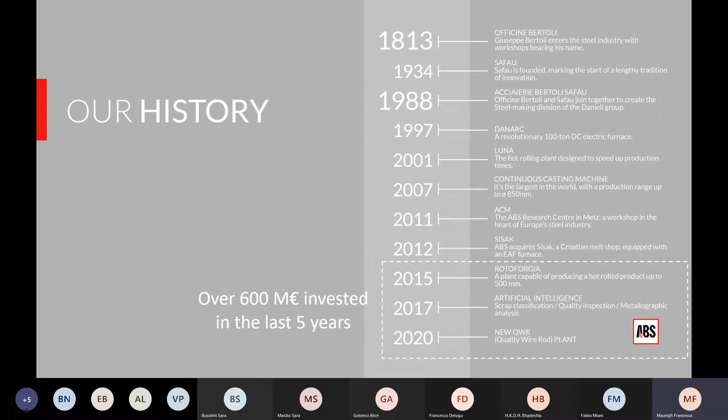Acciai Bertoli Safau is located in Udine, a small town in the northeast of Italy, about 100 kilometers from Venice, towards the border with Slovenia on the eastern side, and with Austria on the northern side. This is where the main productive site is placed.

There is also a second, smaller productive site located in Croatia, in Sisak, not far from Zagreb. As I said, our R&D division, ACM, which stands for ABS Centre Metallurgique, is based in Metz, in France. We also have commercial sales offices spread in Europe, apart from Italy, in Spain, Germany, and Sweden, where our main European customers are present.

We are exporting steel to many different countries worldwide. About 50% of our output is sold to Italian customers, whereas the remaining 50% is mainly delivered in Europe, and about 10% of our output is exported outside of the European community.

We are producing many different steel grades, over 1,000 different grades, which are mainly used for mechanical engineering purposes. But our very important sectors are also the automotive sector, as well as oil and gas and power generation, and many other smaller applications.

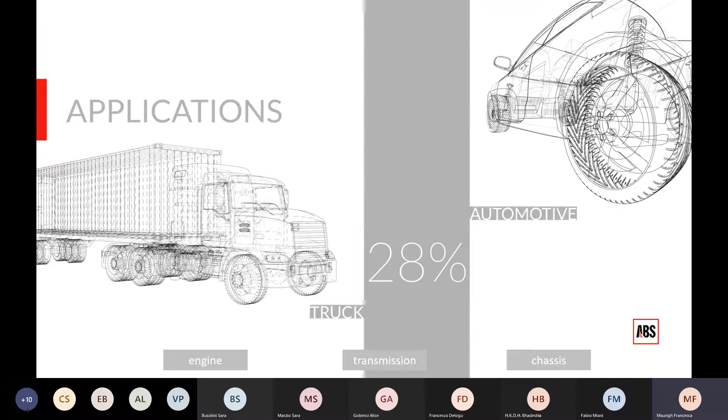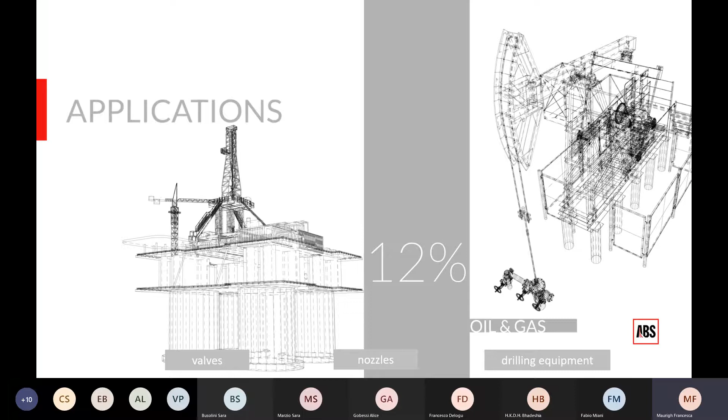The oil and gas market is important for either the forging of valves, nozzles, but also for direct machining of many different parts used in drilling equipment.

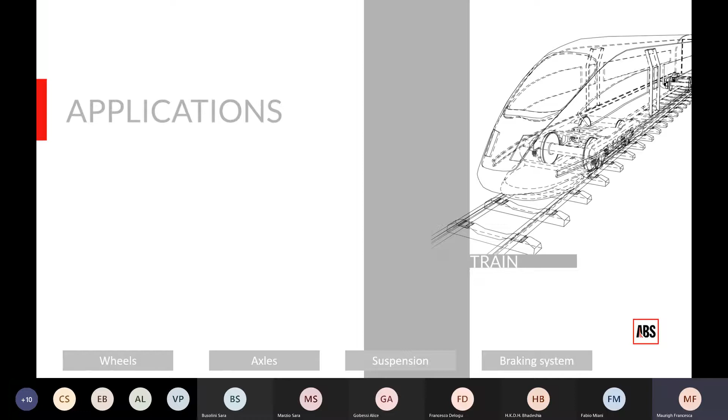Another important application for our products is what we call the railway sector. Our bars are used for forging and machining of wheels and axles for trains, including high-speed trains, as well as for some suspension parts and for parts used in the braking system of trains.

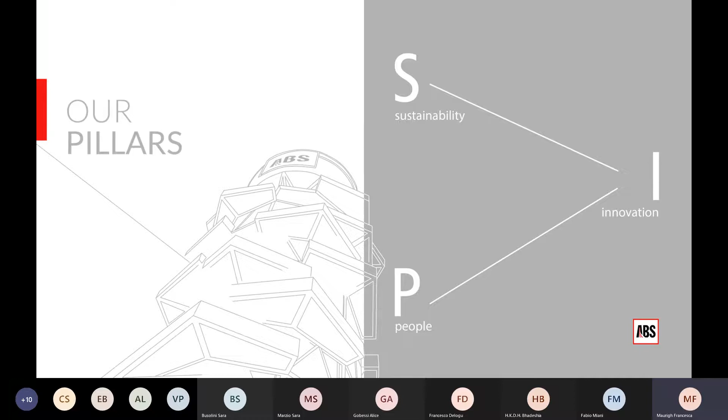If we have to summarize the key points of our company, I would say that sustainability, innovation, and care for people are the three most important topics. When we speak about sustainability, we mean sustainability not only from an economic side, but also from environmental and social sides. If we speak about innovation, we will later see what we mean by innovation in the production of long products. And people, of course, is a key driver for supporting innovation and sustainability.

So if we move to the description of our production process, let's say that ABS is a steel mill which starts from scrap. The scrap is collected into the scrapyard, and then it is charged into one of our electric arc furnaces, where it is melted.

Once it is melted and tapped from the electric arc furnace, we have several ladle furnace stations and vacuum degassing tanks, where we carry out the refining process, and for most grades, the degassing process as well, as it is a very important step for guaranteeing a high level of quality for the grades we produce.

Once the steel making process is completed, the solidification of the steel can be carried out by choosing either continuous casting machines or ingot casting. So we can solidify the steel either by means of continuous casting machines or in a more traditional way, into ingots.

Once the ingots on one side, or the continuous cast blooms on the other side, are produced, we stock them, then we reheat them inside either walking beam furnaces or pit furnaces, in the case of ingots, and we use one of our rolling lines.

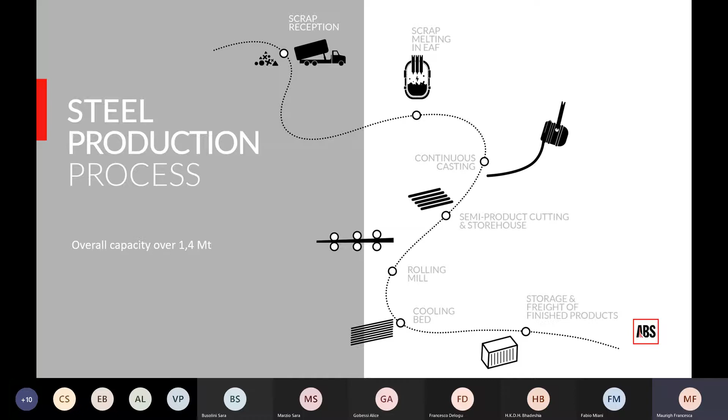Each melting line is formed by an electric furnace, a ladle furnace, and a vacuum degassing treatment station. We have very recently started a new LF and VD station in order to increase our capability for these processes. Another electric furnace in line with a ladle furnace and vacuum degassing treatment tank is placed in the mill

that we have in Sisak, in Croatia.

In ABS Udine, we have three continuous casting machines. The machines are different with respect to the casting size. We call them in a very easy way: CC1, CC2, and CC3.

The most interesting continuous casting machine is the CC3, which is also called Hercules because of its size. I will later show some details about this almost unique machine.

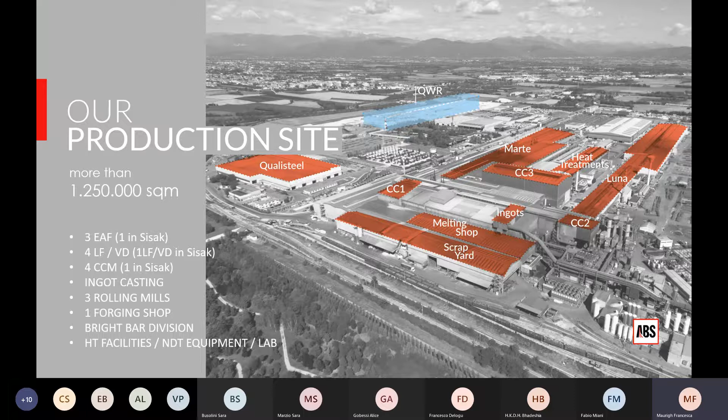We produce more than 1,000 grades. Our yearly output, our yearly capacity, is about 1.4 million tons, and therefore we are considered quite a big mill for the production of long products, at least in Italy, of course. This is our range.

I would say this is one of the strongest points of ABS, because basically we start by rolling 5 millimeter wire rod, and we can deliver up to forged bars with a diameter of 1 meter. In between, we are really covering almost any possible product in either round or square shape.

We have a wide range of continuous cast blooms, most of them in round section, starting from 200 millimeters up to the biggest size, the jumbo size of 850 millimeter round. This wide range of conti cast blooms allows us to offer the market a wide range of hot rolled products as well, starting from 29 up to 500 millimeters of diameter for round bars.

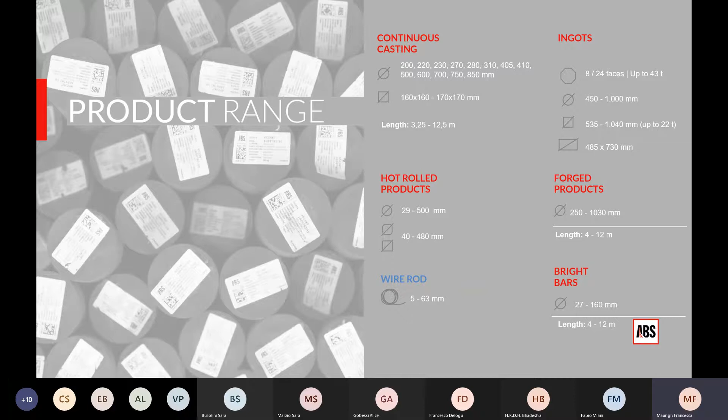I will not describe step by step all the productive facilities we have in ABS. I will just focus on what is more interesting and more unique among the machines installed here.

One of them is for sure what we call continuous casting number 3, because this is one of the largest continuous casting machines in the world for the production of blooms. It can cast blooms starting from 500 millimeters, which means half a meter, up to 850 millimeters. It's a curved continuous casting machine with a radius of 18 meters, so really big.

It has 2 electromagnetic stirrers per strand, and this has allowed ABS to replace a significant amount of ingots as a starting product to roll very big rolled bars, but also as a starting product to be directly sold to our customers for hot forging applications, such as ring rolling and open die forging of really very large products.

So this is really quite a unique plant. There are not that many machines bigger than this one. For sure, in Europe it's still the biggest. Out of Europe, I think in China you can find something bigger, but it remains one of the biggest continuous casting machines.

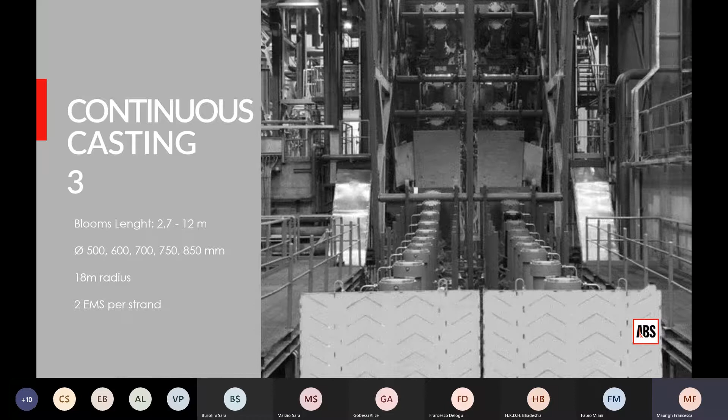Another unique piece of equipment we have installed in ABS is what we call the rotoforgia. This is a rolling stand, as you can see in this picture. What's particular about this stand is that it's the largest stand in the world for the rolling of long products.

The maximum diameter of the cylinder of the roll used is 1.8 meters, and we can roll bars up to 500 millimeters of diameter with very good performances in terms of internal soundness.

This rolling stand is capable of ensuring a good level of internal soundness, which makes these products not so different from typical forged products obtained by means of forging instead of rolling.

This is thanks to the fact that a high reduction ratio, but also a high squeezing capacity - the capacity to deform the material up to the core - can be applied to the bars under rolling, bars which can be rolled from either huge, big conti cast blooms or from ingots.

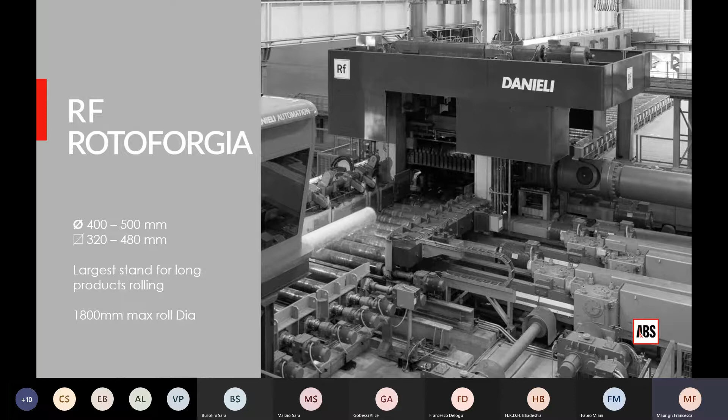Let's say the newest plant, installed almost a year ago, is in ABS, so we are completely on the opposite side of our size range. I've just talked about the rolling of big bars. Now I'm moving to the rolling of wire rod.

This is a wire rod mill, a plant with a very big capacity, almost 500,000 tons per year of special steel wire rod. The size range is 5 to 25 millimeters of diameter, capable of covering most applications obtained by wire.

It's a brand new plant with a very high level of automation. In fact, we call it quality wire rod 4.0 because Danieli has tried to develop the zero man on the floor approach, as well as the highest automation level for this kind of plant.

The full process is controlled remotely. We have tried to develop, in terms of reheating process, low scale and energy saving reheating processes. We have tried to set up the highest level of control of the size range during rolling.

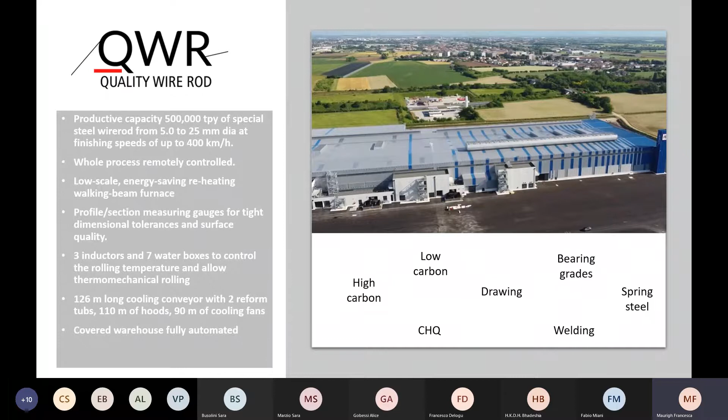So this is a very short introduction and description about ABS. Let's now move to what our R&D division is.

As I said at the beginning of the presentation, our R&D lab is located in Metz, France. It's called ABS Centre Metallurgique. There are 18 people working in Metz with different kinds of graduation and skills.

All of them are oriented towards giving support for either the development of our processes, to improve the performance of our products by controlling and improving our processes, and towards the development of new products, new grades, or modification of existing grades, following our customer needs in terms of higher reduction of CO2, hydrogen sensitivity, better performance in mechanical properties, fatigue, and so on.

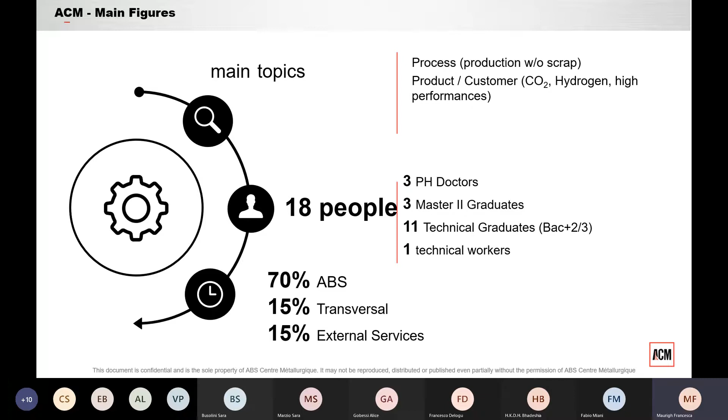ACM is mainly working for ABS, but can also offer services externally, thanks to the fact that the laboratory of Metz is qualified ISO 17025 for some of the most common and typical characterization tests carried out on steel.

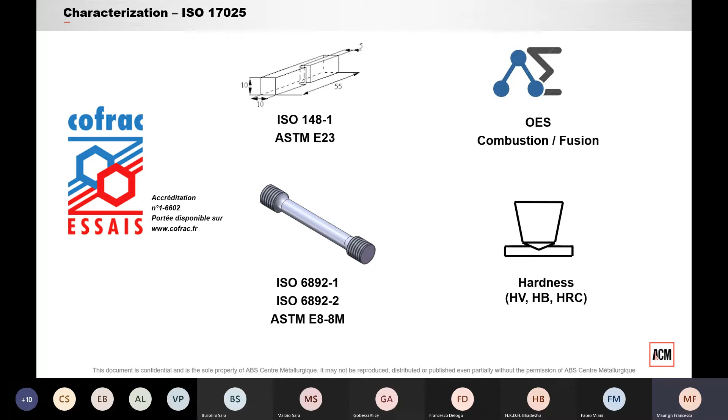But I really want to spend a few minutes to present some of the activities that ACM is following. ACM is providing assistance and support for industrialization and development of new grades, thanks to the fact that we can perform a deeper characterization than the standard one, as far as macro cleanliness and micro cleanliness of steel are concerned.

We have an ultrasonic immersion tank for UT tests. We have an electron scanning microscope, automatic inclusion identification and classification. We can perform plasto-dilatometer tests to provide further information about the grades we are studying. We are using several predictive modeling tools to try to model our processes.

We are also committed to developing new solutions for our customers, mainly following two directions. We are trying to make our products more sustainable, for instance by developing grades that don't need heat treatment processes.

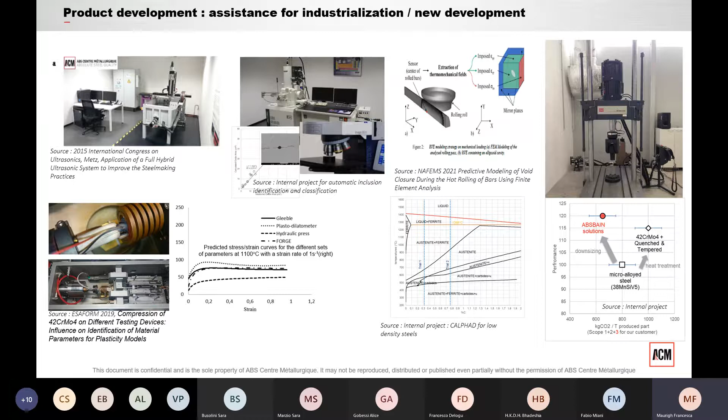We are also trying to provide higher performance to our steel products in order to let our customers achieve downsizing of parts, and therefore lighter final parts, and therefore reduction of emissions of CO2. These are the most important directions we are trying to give to the development of our products.

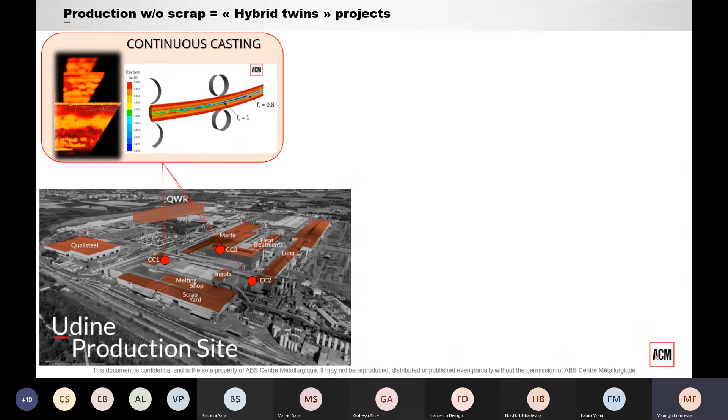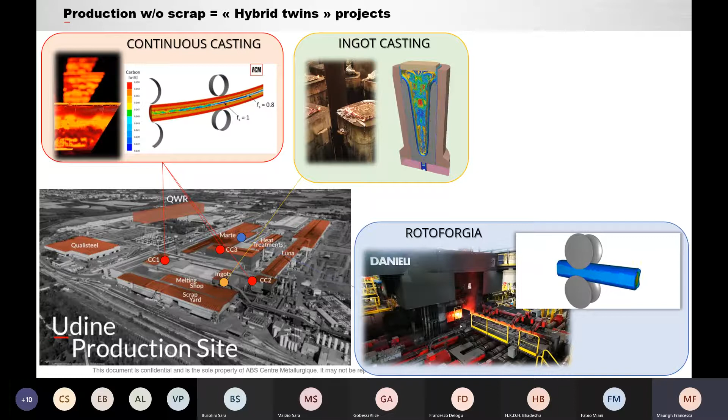If we speak about support for development of our processes, which of course aim also to provide better performance to our products, we are developing what we call hybrid twins projects, for instance about continuous casting, about our ingot casting processes, about our rolling processes, trying to model reheating processing and rolling processes, aiming to achieve the best core conditions for our rolled bars.

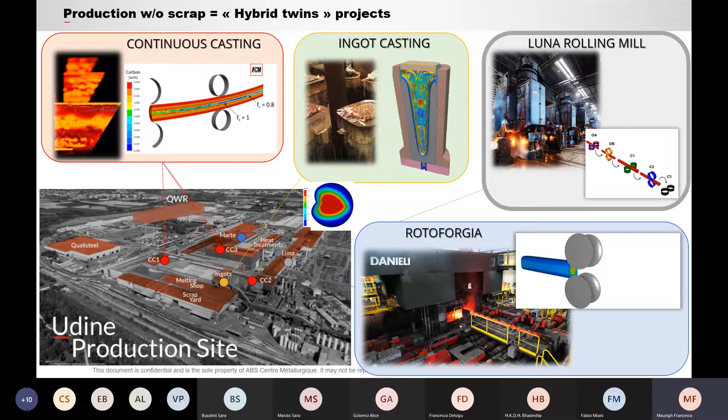We are also developing models for our second rolling mill in order to try to optimize the plastic deformation under rolling, therefore achieving better surface quality and better surface performance for our bars. So that is really a very quick overview about our company.

I have finished. I hope to be on time, not too long, but thank you for your time. If there is any kind of question, but if we are not too late, because I don't want to keep time from the lesson, I'm here. It's up to Harry to decide. As for me, as you would prefer, Harry. I don't know if you have any other issues that you prefer to start with. No, I think we'll take questions.

So I have one question. In the new wire rod mill, you explained that you have hoods to slow the cooling rate down and fans if you want to accelerate the cooling rate. So what sort of product requires you to slow the cooling rate down?

There are grades which need to be developed to be delivered with very soft properties, such as CSQ quality. This is material which is then drawn and cold forged, so anybody doing the cold forging is of course needing soft material. There are some grades which are more critical, and we need to go through annealing processes out of line. But there are many other grades, such as boron grades, typical boron grades for CHQ quality, where we need to slow down as much as possible in order to guarantee a maximum hardness and a maximum tensile strength to be cold forged directly without the need for any annealing treatment before.

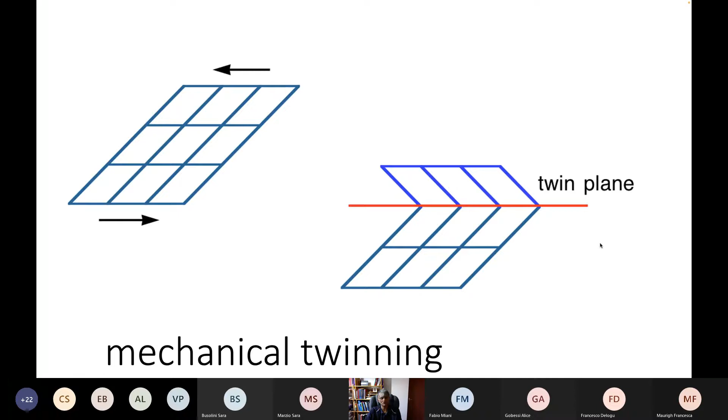And in the case of austenite, the twinning system, that means the plane on which the twinning happens, is the close-packed plane, the one-one-one type plane, and the direction in which the twinning happens, the twinning shear, is directed.

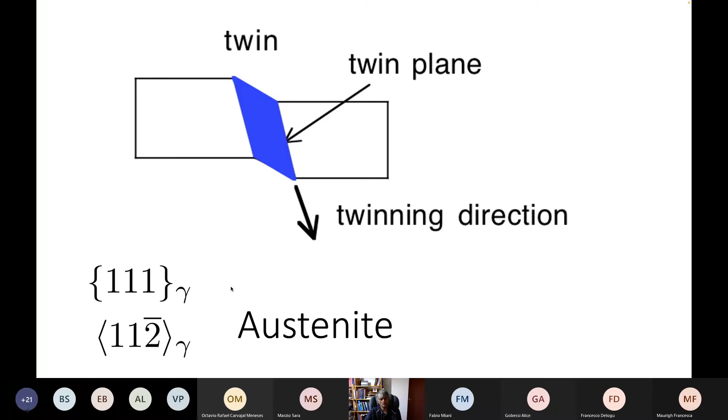So the twinning system in austenite consists of a twin plane, which is the close-packed plane of the austenite, and a twinning direction within that plane, which is of the type 112. I'll illustrate that later, but the twinning direction is the 11-bar-2 in this case, and the twin plane is the plane which remains unaffected by the twinning deformation, which is the 111 plane of the austenite. We know that the 111 plane is close-packed, meaning the atoms touch along all three directions, giving a high packing density inside that plane.

The close-packed planes are stacked above each other in the FCC structure of austenite in a sequence A, B, C, A, B, C. Now what do we mean by that? If in this particular plane the atoms are located at positions A, there's a dip in between these three atoms, which is position B, where the atoms in the plane above can lie, or in a position C.

If I translate just from A to A, that doesn't change the crystal structure. That is simply like slip happening along the 110 type directions. A translation through that vector doesn't change the crystal structure.

However, this direction A by 2, 110, where A is our lattice parameter, can be split into two 112 type vectors: A by 6, 211, and A by 6, 12-bar-1. If I translate the layer above this layer from a C position to a B position, then I actually change the crystal structure. I've introduced effectively a fault in the lattice. If I carry out this translation on every single 111 plane, the result is a twin, a mechanical twin in the austenite. So the displacement is A by 6, 211 here.

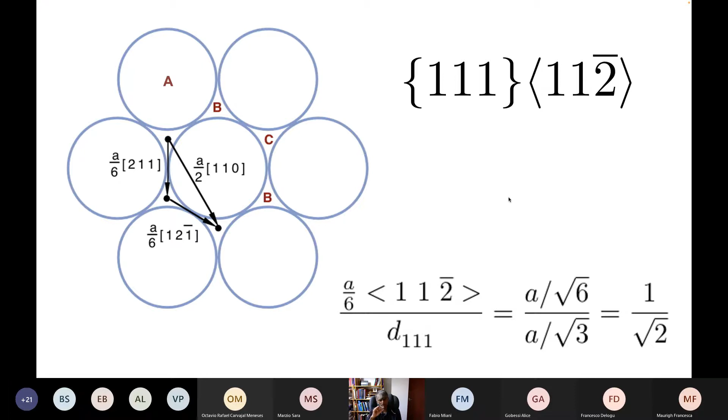So twinning involves very large deformation, and that's why mechanical twins will always form in the form of very thin plates in order to minimize the strain energy.

So this plane here is our close-packed plane, and I'm stacking them in a sequence A, B, C, A, B, C, illustrated over here. This represents our face-centered cubic crystal structure of austenite, and this is a repetition of that stacking sequence, A, B, C, A, B.

Now I'm going to displace one half of that crystal relative to the other by A by 6, 112, and that results in this: we have A, B, C, B, C. Then I conduct another displacement on an adjacent close-packed plane, and that results in A, B, C, B, A.

Notice that about this twin plane C, I have reflected the crystal structure. B reflects to B, A reflects to A. So this is our mechanical twin, and its lattice is a reflection about the twin plane of the parent structure.

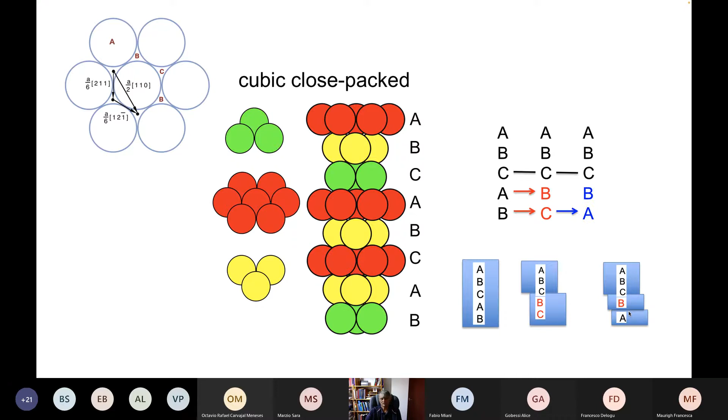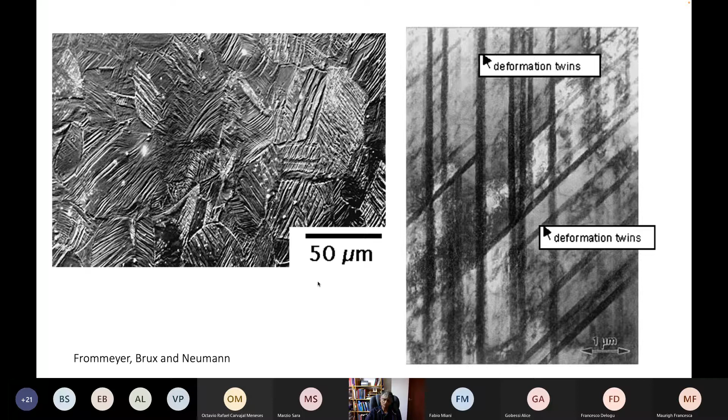Yielding, the yield strength in this particular case is really quite small, about 300 megapascals. But you can continue the deformation until the strength exceeds 1.2 gigapascals and maintain an elongation of something like 60%. This is quite a remarkable combination of properties, but it starts off at a low yield strength, and then there's a steady work hardening rate as deformation continues.

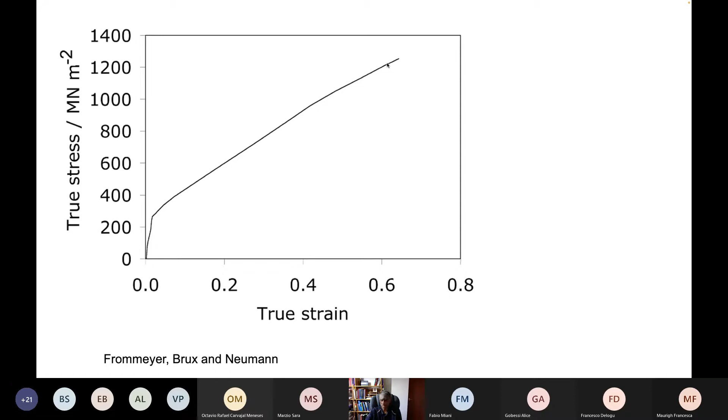So what is the reason we don't get an early plastic instability? Just like in normal steels, you don't get to 60% elongation at this level of strength. Well, what's happening is something known as a dynamic Hall-Petch effect. In other words, the formation of mechanical twins effectively reduces the grain size of the austenite. So as the twins form, the effective grain size in the Hall-Petch equation is decreasing during deformation, and that is what gives us the work hardening that prevents an early onset of plastic instability. We are not transforming this austenite into martensite at all, it's just mechanical twinning, refining the effective grain size as deformation proceeds.

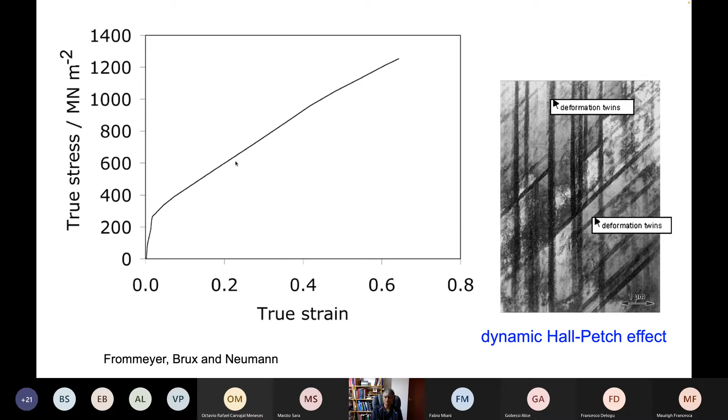So TWIP steel's typical composition is 25 manganese, 3 silicon, and 3 aluminium. If you only had the manganese and iron, you would still get it fully austenitic, but it would tend to undergo phase transformation to epsilon martensite as you deform. The addition of these further elements, there are various reasons for adding them, but one reason is that you remain fully austenitic as you deform. Now, because silicon and aluminium have low atomic weights, the overall density is actually reduced quite significantly. Normal iron has a density of about 7.8 grams per centimeter cubed, this is 7.3 grams per centimeter cubed, and it's fully austenitic and maintains its properties to cryogenic temperatures.

So one application for TWIP steels that POSCO has considered is pressure vessels used to carry liquefied gas. They are usually made from 9% nickel steel, but they have also made them from TWIP steel. And of course, as you lower the temperature, there's no significant change in toughness. Therefore, there's also no significant change in toughness as you increase the strain rate, up to 10 to the power of 3 per second.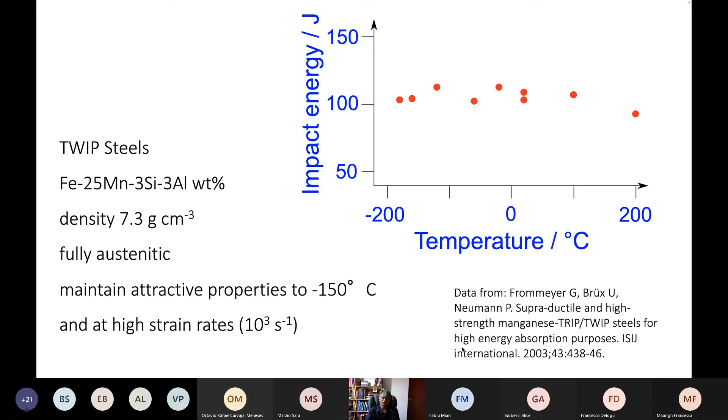Now, everything looked very promising for these TWIP steels for many years for automotive applications, because if you have a large elongation and a large strength, that's a good thing for formability. But when some components were made, they tended to crack spontaneously after a certain period of time. This is known as delayed fracture, and it's illustrated here in a cup that has been drawn out from TWIP steel. This is a 22 manganese, 0.6 carbon TWIP steel, and after an unpredictable amount of time, the cup simply cracks up. Now, the purpose of drawing out a cup is that you also have residual stresses inside that drawn cup. That combined with something else causes this delayed fracture.

But the addition of aluminium gets over the problem. However, when the delayed fracture problem was highlighted, the automotive industry basically abandoned TWIP steels because they thought of them as being unreliable. The problem is actually solved by the addition of aluminium, and there are various ideas on how this stops this mechanism of fracture, which is associated with hydrogen embrittlement. This kind of fracture can be accelerated by introducing further hydrogen into the material, so there must be something about aluminium which prevents that hydrogen embrittlement of austenite.

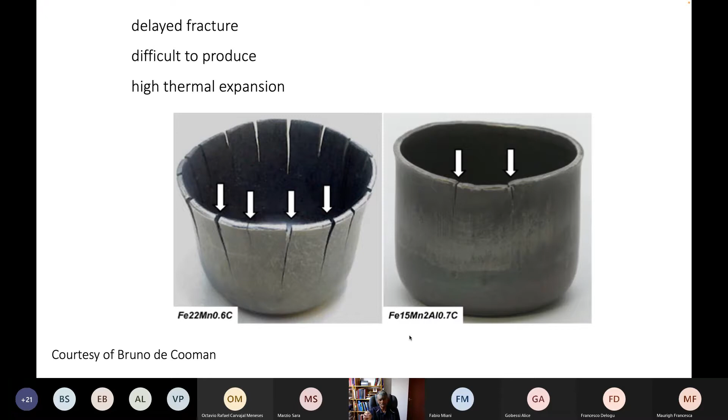And there are various models for this, but one which is really interesting is that the aluminum atom causes a localized expansion around it. So for example, if this is our face-centered cubic unit cell, and these are the heights of the atoms, these are the face-centering atoms, then the distance between the iron atoms and the aluminium atoms is larger than between the iron-iron atoms.

So there's more space created in the interstices between the substitutional atoms, and that is where hydrogen gets trapped.

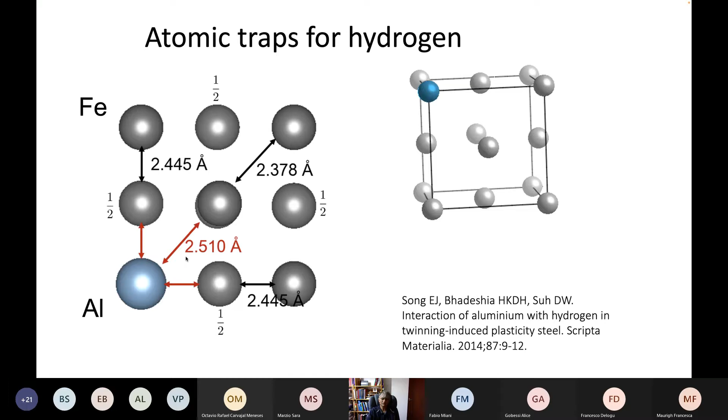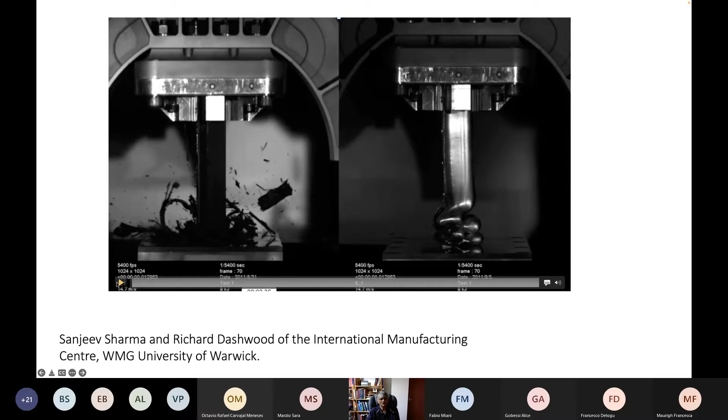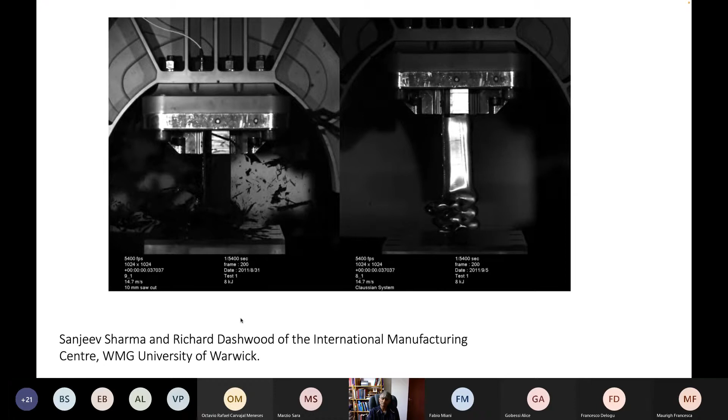people tried to create crash resistance using TWIP steels because they can continue to deform to a large degree of deformation. So the kind of objects I'm talking about: on this side we have a composite material, on this side we have a steel. What you do is you want the material to absorb energy. In the case of the composite, it's by breaking interfaces between the composite components. And in the case of steel, by forming this concertina structure, which absorbs energy by deformation.

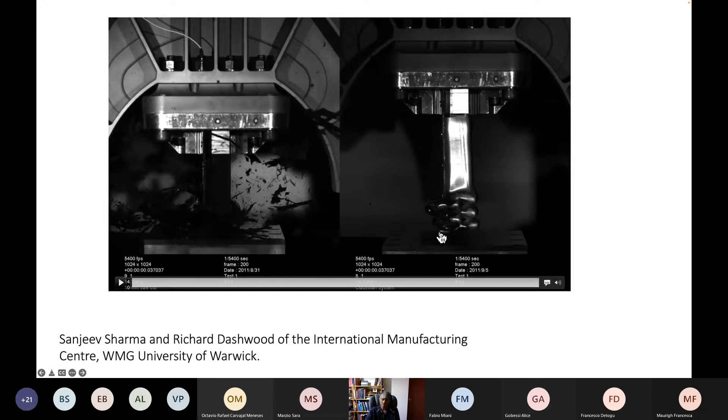Now, the problem with TWIP steel is that its strength only rises gradually. Whereas in this kind of scenario, you are only putting large strains in localized regions, and therefore you don't absorb as much energy as you would expect if you had a curve which was flat like this, except near the yield region. So this application doesn't prove to be successful.

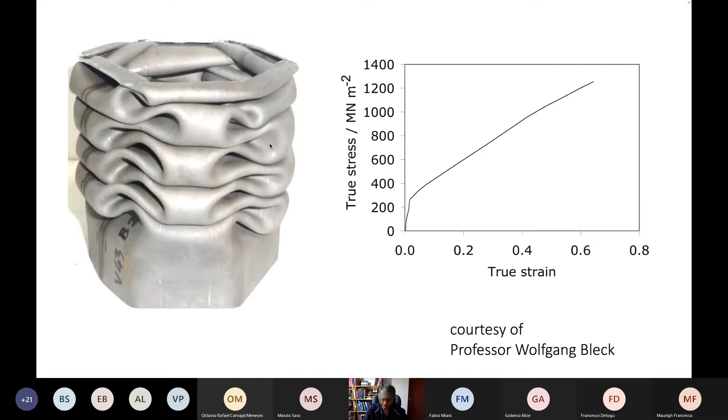However, some very clever engineering by the German railway system has provided a new kind of application for TWIP steel, where in a crash scenario, the whole of the material would deform uniformly. Now, how did they find this engineering solution? Well, these are the crash energy absorbing devices in a railway tram, railway carriage.

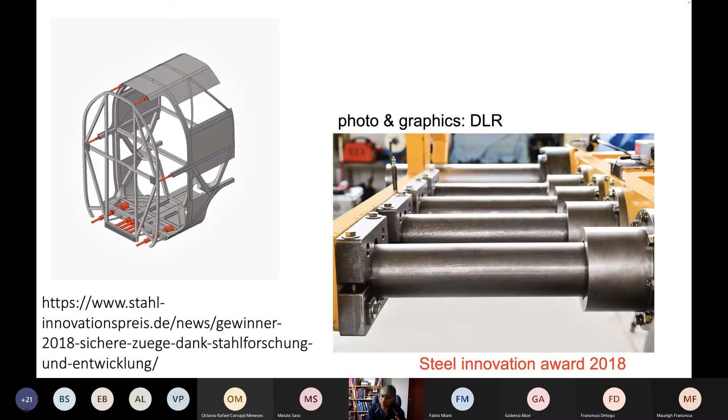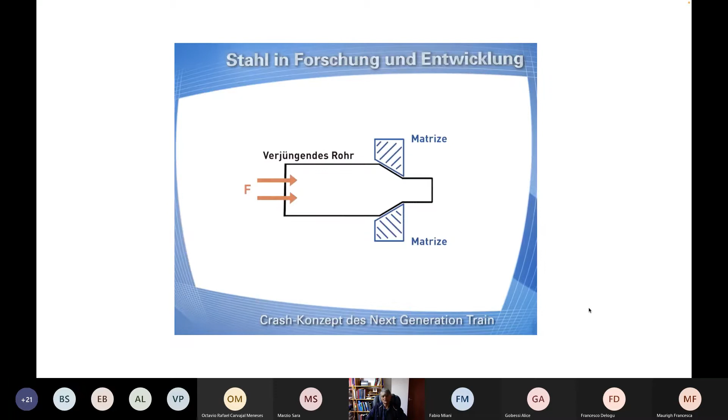What you do is you have these pipes made out of TRIP steel, TWIP steel, and during a crash, these pipes get extruded through dies, and therefore the TRIP steel is uniformly deformed everywhere up to its maximum capacity. I'll show you a video here of the actual behavior of this during a crash. So basically, you're absorbing energy by extruding the TRIP steel.

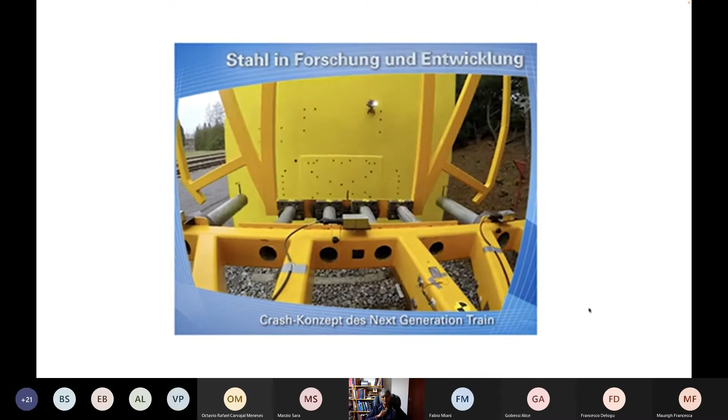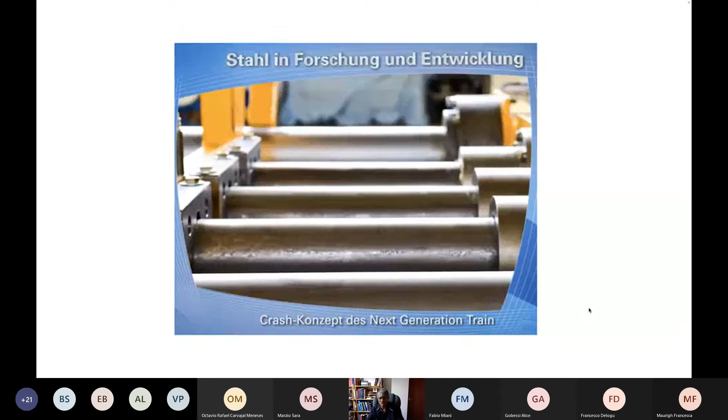I don't know if you saw, but there was extrusion of those TRIP steels through the dies, absorbing energy and stopping that train carriage. I thought this was an incredibly clever mechanical engineering solution to the problem.

So TRIP and TWIP involve transformation or twinning deformations caused by an externally applied stress. Both of them work by increasing the work hardening capacity of the material, and they both lead to greater strength and greater ductility.

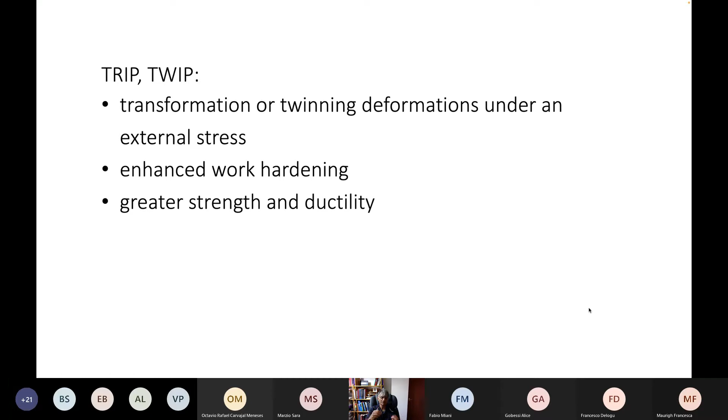Now I want to change the subject a little. Here, in all the examples, both in TRIP steels and TWIP steels, we are exploiting the phenomena by physically deforming the material using an externally applied stress. Now, is it possible that stresses that are generated when constrained components cool - in other words, residual stresses - can themselves trigger these effects and therefore cancel out the residual stresses?

I want to show you an example where transformation-induced plasticity is used to stop the accumulation of residual stress as large components which are constrained are locally heated or cooled.

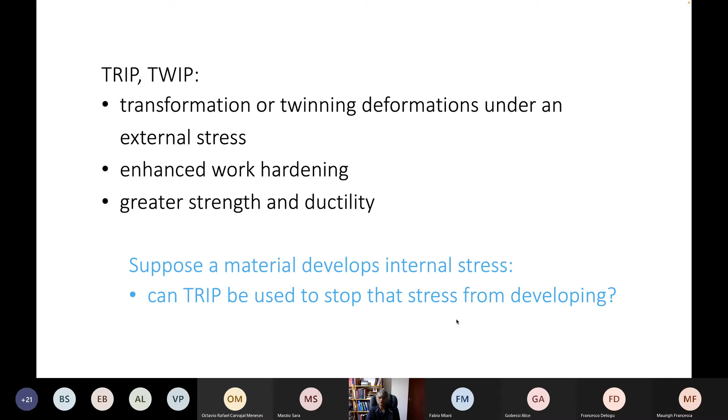So welding is an obvious example because we take two bits of steel and in between we put liquid metal. The liquid solidifies, and if your component is large, these parts don't really want to move as the weld contracts, and therefore you accumulate stress. So that's illustrated over here.

Liquid can of course flow, so there is zero stress when this weld pool is liquid. As soon as it solidifies and the temperature drops, it will start contraction, and therefore you will build up a residual stress. And residual stresses can be very bad for the component in several different ways.

So if there are any stress concentrations, they induce fatigue failure because the applied stress will be complemented by the residual stress. It also means that the stress that you apply to the component has to be smaller than you would expect from the yield strength of the material used to make the component.

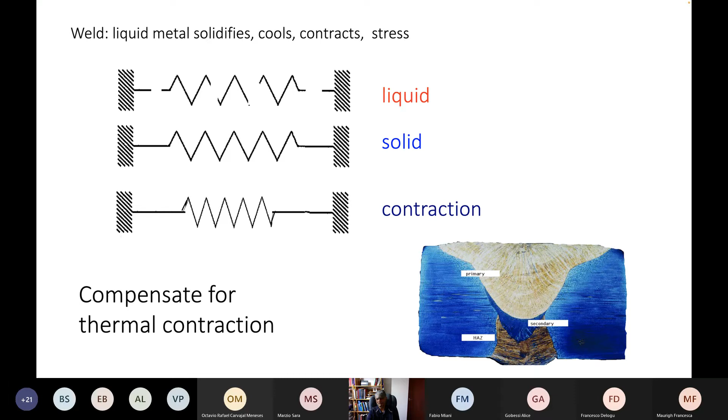So is there any way that we can compensate for this kind of thermal contraction, where after solidification, you build up stress simply because these two ends are completely constrained? So if this is a very large assembly, like one of these platforms, or you're welding pipelines, etc., then residual stresses can be extremely important in your design process.

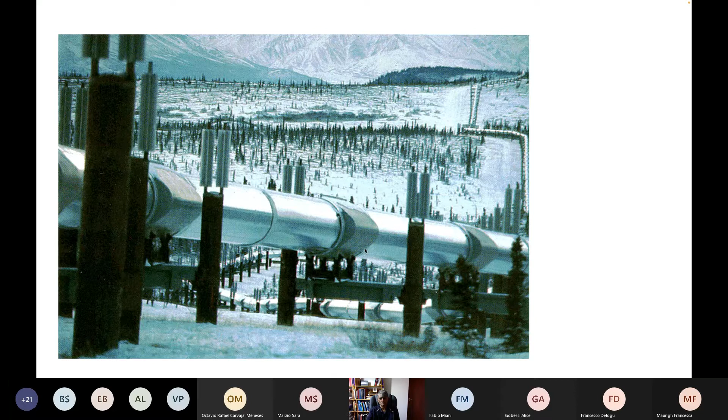Okay, so imagine that we have a sample here, which is an austenitic stainless steel and remains austenitic at all temperatures. This was a classic experiment done in 1977 by Alberry and Jones, where they heated this tensile sample to a high temperature and then physically fixed it and allowed it to contract. As it contracts, you get an accumulation of stress.

It's not - if it was only thermal contraction, this stress would rise rapidly. But at high temperatures, some of the thermal contraction is accommodated by ordinary plastic deformation. So the rise in stress is lower than you would expect, but nevertheless significant at about 300 megapascals.

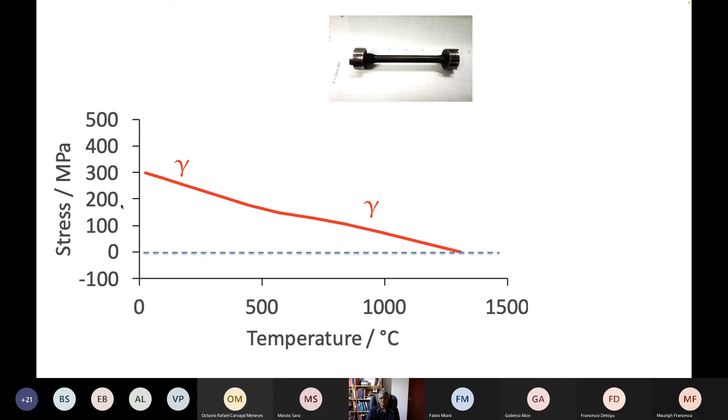Now suppose you do the same experiment with a steel which transforms during the cooling process. This is a bainitic steel, and once again we get the rise in stress due to thermal contraction. But as soon as we get the onset of phase transformation, that compensates for the thermal contraction, and we get a reduction in stress. However, when the phase transformation is exhausted, meaning all the austenite has gone, the stress begins to rise rapidly, and we end up with a large residual stress at room temperature.

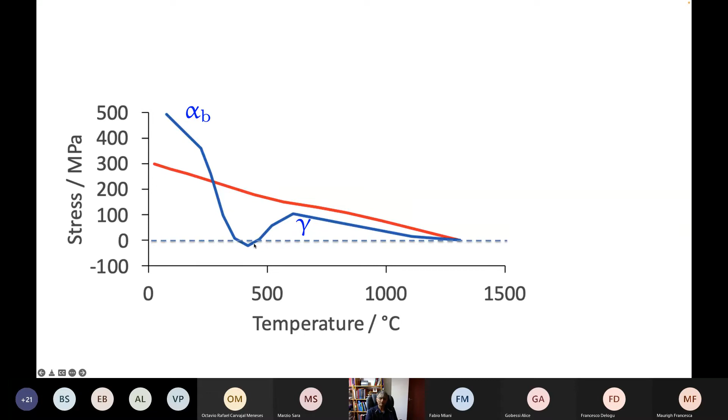So what happens if we lower this transformation temperature? Instead of bainite, if we now produce martensite, once again the same phenomenon occurs until we get phase transformation, which cancels out the effects of thermal contraction. Because the transformation is exhausted at a lower temperature, we end up with a smaller residual stress.

So this gives you an idea on how to design a welding alloy that would leave your component with zero residual stress at ambient temperature. All you have to do is move this point to somewhere along here. Cause the phase transformation to happen at a temperature of around 200 degrees centigrade, and all the austenite should be used up by the time you get to ambient temperature, because we don't want retained austenite left.

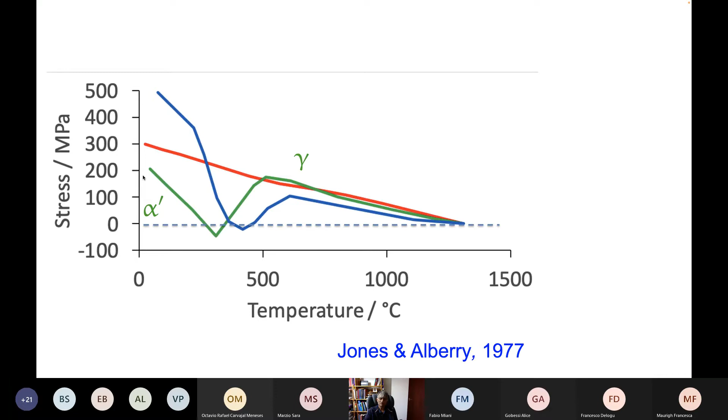Now, when designing a welding consumable, you can't simply just alter the transformation temperature. You have to look at a very large range of mechanical properties which have to be satisfied. For example, the toughness measured in either of these ways, or the fatigue properties, corrosion properties, etc. So a design problem is never simply a single parameter.

And that is where graphene has gone so badly wrong - they were looking at the strength of a carbon-carbon bond and then claiming all sorts of things. But you can't actually use that at all for structural applications. You have to have a whole bank of properties in order to make something useful.

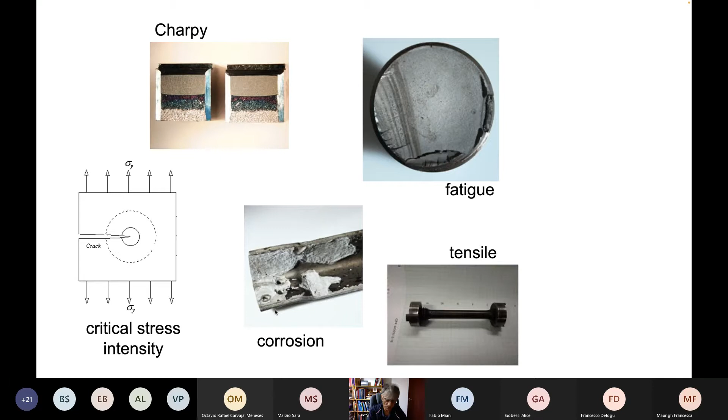So how do we do this? We have a lot of experience in designing welding alloys, and this is a commercial alloy. Quite straightforward - all of these contain a very low carbon concentration because we don't want to produce martensite. There's a certain amount of silicon and manganese added for deoxidation, because remember, you're pouring the liquid without any of the normal refining processes that we implement for normal steels. And there's a certain amount of hardenability required to avoid high temperature phases.

So this is a commercial electrode which transforms at a high temperature of about 450 degrees centigrade. These are three alloys which transform at low temperatures, and you can see that the nickel concentration here is quite high, to force the transformation temperature to a lower temperature.

Now, the first thing that a steels person will say is that nickel is expensive. But remember that the amount of welding material you use is not very large. And furthermore, if you increase the life of the component, then the overall cost is actually reduced. So never just look at the cost of an alloying element - look at the benefits that it produces, and whether, if you look at the whole life cost, that is reduced.

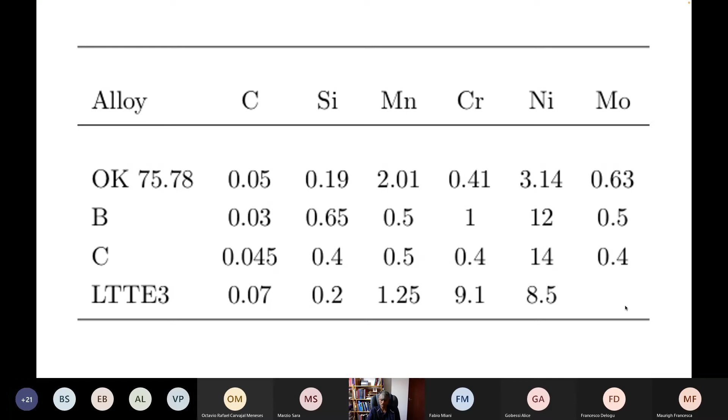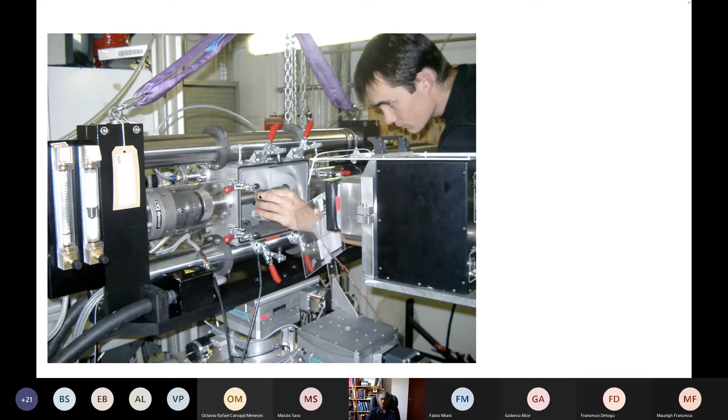So we designed these three alloys and decided to repeat the Alberry and Jones type experiment, but this time also using X-ray diffraction to follow the phase transformations and various other features of the behavior as the material cools. This is effectively a dilatometer attached to a beamline at Grenoble, with high energy X-rays coming out from here, and this is our sample positioned inside the dilatometer. We can monitor everything that happens - the stress, all the information from the high energy X-rays and so on as the cooling happens. So it's straightforward from X-ray diffraction to calculate how much austenite you get and how much ferritic transformation products you get as the material cools quantitatively.

So I'm going to show you now the Alberry and Jones type curves taken using the technique that I've described.

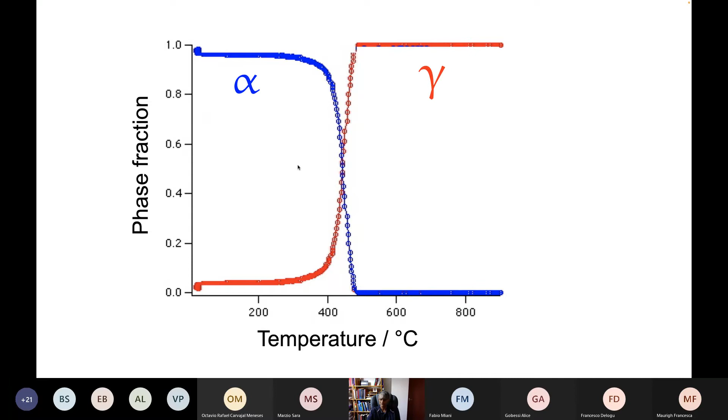Now, of course, these are tensile specimens, and what you've got to do is prove this for an actual weld metal. These tensile specimens are roughly 5 millimeters in diameter, because the X-rays can then penetrate the whole of the specimen. Whereas a weld will be a much larger object, which cannot be penetrated by X-rays.

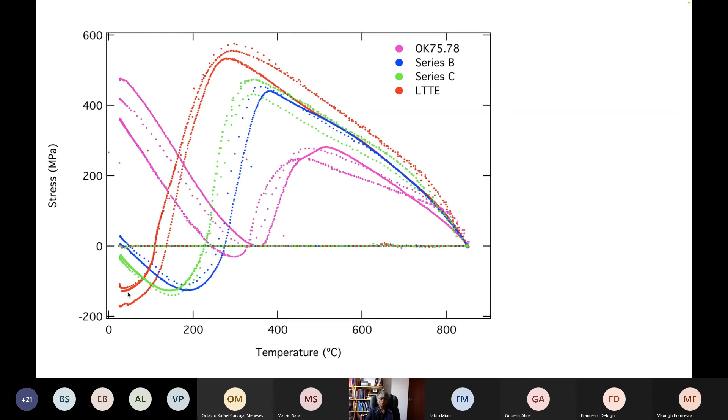Okay, so this method actually works, and there are many tests now in the literature, going from the work of Ohta and so forth, which show that actually the fatigue properties are improved because of this compressive stress system that you develop.

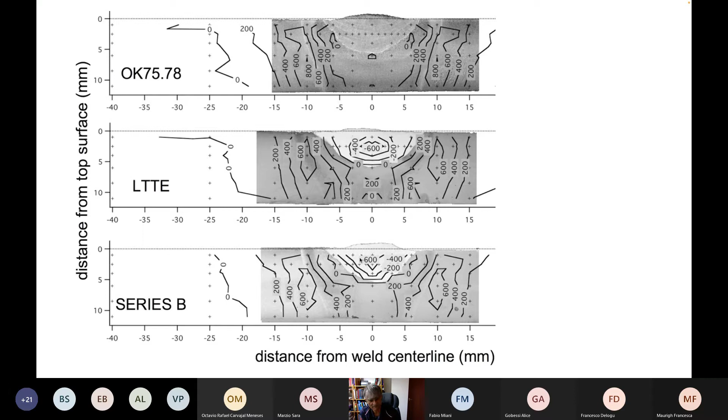Now, supposing that we wanted to design, so these are actually transformed into ferritic transformation products, but supposing we wanted to design a stainless steel containing a large chromium concentration, okay? So we need a chromium concentration greater than 12 weight%, because that gives you a reliable, coherent and adherent chromium oxide film on the surface, which regenerates if it is scratched.

We must have virtually zero carbon concentration because of the problem of carbides forming, chromium carbides forming. We need a low martensite start temperature, but not too low, so that we can exploit the full capacity of the phase transformation. And we need to suppress the martensite start temperature with solutes other than carbon.

But at some temperature, it must be capable of being fully austenitic. Now, if you add lots of chromium, then you can end up with some delta ferrite, which remains stable at all temperatures. So we need to balance the alloy so that it can become fully austenitic at high temperatures. And it's important that it solidifies as delta ferrite, because sometimes delta ferrite can absorb impurities, right? And therefore you stop hot cracking of the welding alloy.

Whereas if it solidifies as austenite, austenite rejects the impurities into the liquid, and therefore you tend to solidify the liquid at too low a temperature, and you get hot cracking developing as the weld pool cools.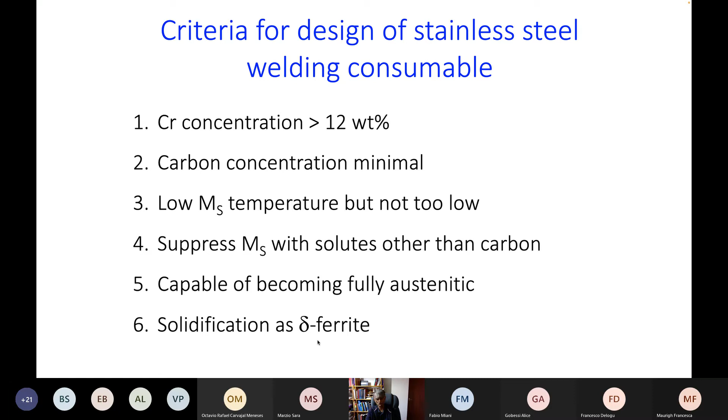So we designed these alloys here. This has a very low carbon concentration, chromium 12%, 4% nickel, so to ensure that it becomes austenitic at high temperatures, and otherwise very, very simple. Now, this is a composition specification, really, that is for martensitic stainless steels, right? But we don't want a very large carbon concentration.

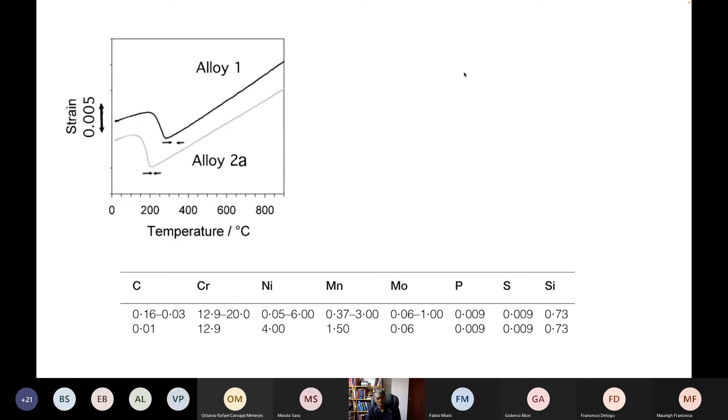So you can see that the transformation happens at a low temperature, okay? Both of these alloys transform at a low temperature, which is exactly what we want. But these are stainless steels. And residual stress has two effects.

And what this shows is, it is so incredibly possible to control a whole bank of features of phase transformations to achieve a good combination of mechanical properties, even when you make large-scale structures. And I'll be happy to answer questions.

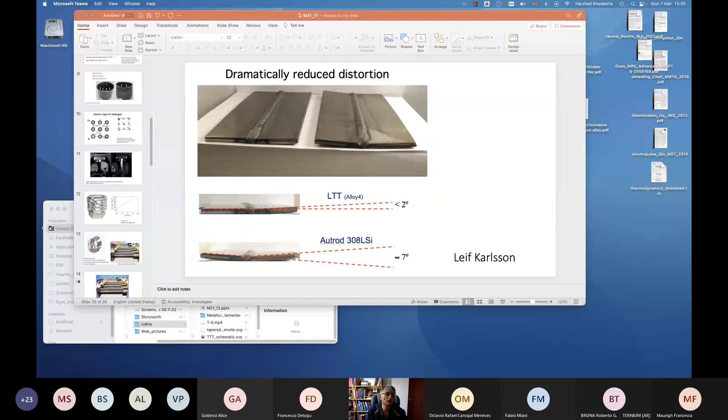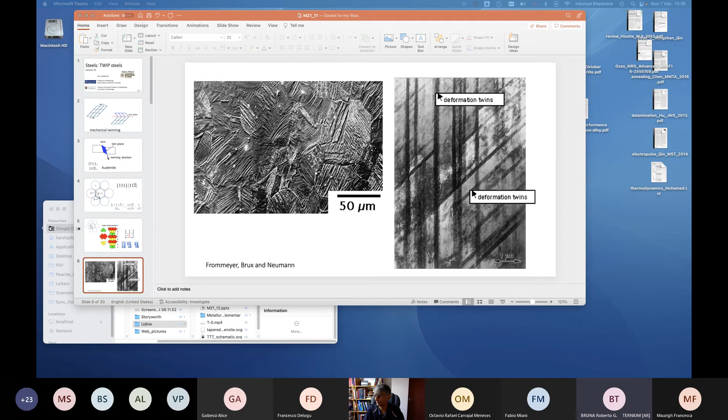Does it mean a nanometric size? It can become that. The original austenite grain size you can see here is like 50 micrometers, but the twinning subdivides it more and more as deformation proceeds, giving us effectively a dynamic Hall-Petch effect. So the size is decreasing and the strength is increasing continuously.